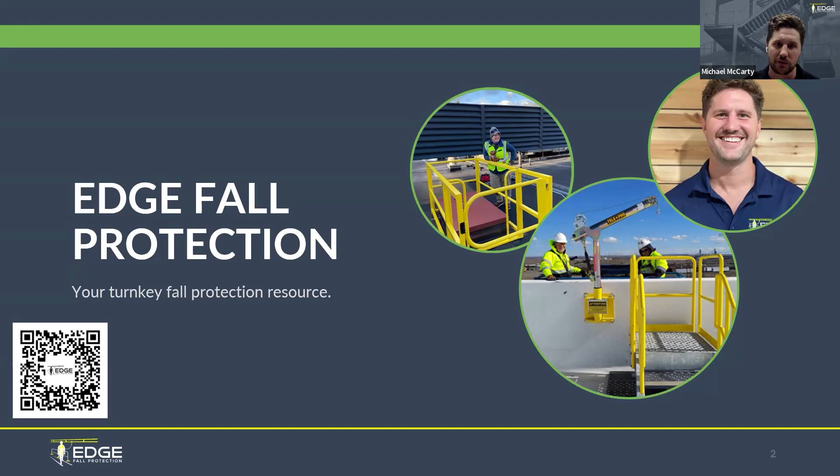Great. So what we're talking about today, we'll talk about the regulating agencies. Really briefly, we want to talk about the ladder code updates, some of the challenges that we're seeing, some of the solutions that we have, and then practical compliance options, followed by, as I mentioned before, that Q&A.

Great. So important safety codes to start off with. I think most of us are probably familiar with OSHA and ANSI. These are the two agencies who really impact the regulations we're talking about today. OSHA, run by the Department of Labor, governing body that enforces regulations to keep workers safe. ANSI, which is a nonprofit organization that coordinates the development of voluntary consensus standards.

So it's a lot of industry professionals in a group that get together and say, hey, here's the OSHA requirement, here's the OSHA standard. How do we take this, kind of make a gold standard, if you will, of how to come up with equipment, inspect equipment, and general guidance for safety.

The specific safety codes that apply to fall protection vary generally. OSHA 1910, we'll talk more in depth about subpart D, but OSHA 1910, it's the requirement that employers need to provide fall protection to all their employees exposed to fall hazards.

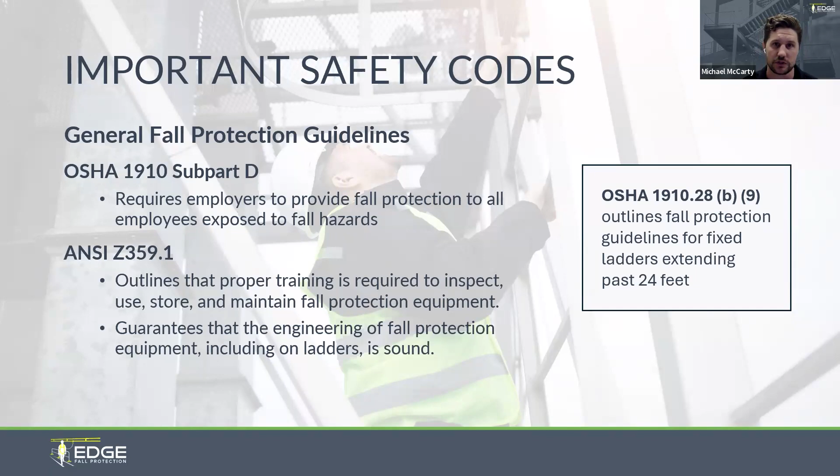Great. So ladder update codes. Would love to know, I think you'll get a Q&A question here. What type of fall protection do the fixed ladders at your work sites use? So I'll just give 30 seconds here for you guys to answer that one.

Awesome. Thanks for the input. So not a lot of personal fall arrest systems in the mix so far. Some no cages, and then no fall protection at all, and definitely some cages still in play there.

So the OSHA update, that 1910 update. So it was the subpart D that came out. The 1910 segment hadn't been updated in maybe 50 years. So what it said was, as of November 19th, 2018, so several years ago, cages are no longer considered an adequate form of fall protection.

So I imagine that there are people in attendance that have had a ladder put on their structure or building since 2018, and it may have had a cage on it. I was at a Master Specifiers retreat in Savannah, Georgia a few weeks ago.

I definitely spoke with some specifiers, some architects that were actively working on a ladder with a cage in it. A lot of people don't know that this is a requirement, but any ladder that was built and installed after 2018 should not have had a cage on it. Going forward, all fixed ladders extending over 24 feet must be equipped with a personal fall arrest system. So that is a little different from what it used to be.

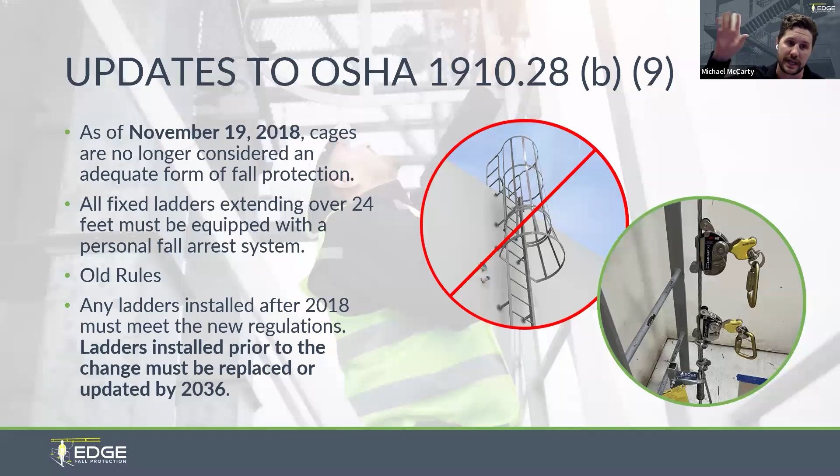And then finally, any ladders installed after 2018, as I mentioned before, must meet the new regulations. Ladders installed prior to the change must be replaced or updated by 2036. So if you had a ladder in 2017, that needs to be updated to the new standard by 2036.

Quick timeline for everyone. Pre-2017, as I mentioned before, cages are considered compliant. Cages really provide a false sense of security. They don't really effectively prevent falls. You slip on a ladder, you fall on a ladder, you're going down, and that cage, unless you're the perfect size for that cage, isn't necessarily preventing the fall. But it is maybe banging you on the way down, maybe limiting the speed at which you were falling. So some issues came out of that, which I'll talk about with the BLS statistics in a moment.

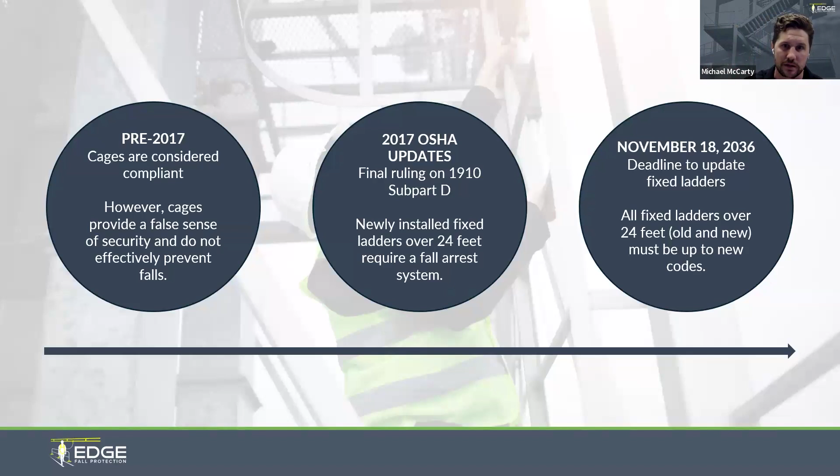In 2017, OSHA updates that final ruling on 1910 Subpart D. Again, newly installed fixed ladders over 24 feet require a fall arrest system. And November 18th, 2036, that's the deadline to update fixed ladders. So all fixed ladders over 24 feet, new and old, must be up to the new codes. So they give us a decent amount of time to say, hey, this ladder is out of compliance as the rule is written now. We have until 2036 to fix it. 2036 is going to come faster than we think if we don't plan ahead.

So ladder safety challenges, kind of why did OSHA update their regulations? Another quick question for everyone. Have you or someone you know experienced a ladder related injury? Okay, so 12% of the folks have had a ladder related injury. So quite a bit. And 35% know someone that has. So almost half of the polled group either has been directly impacted by an injury or knows someone that has. That is a very high statistic.

Some other statistics for you guys. This, again, is BLS, Bureau of Labor Statistics; the most recent data we have is from 2020. Ladders are always in the top 5 of the OSHA top safety violations. The last year, in 2024, they were 3, and in 2020, there were 22,000 non-fatal injuries from ladders, 610 fatalities, 130,000 emergency room visits, and $24 billion in expenses.

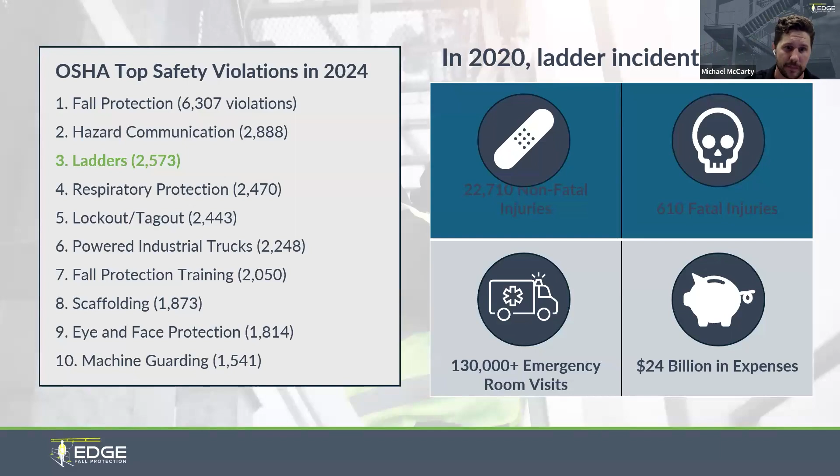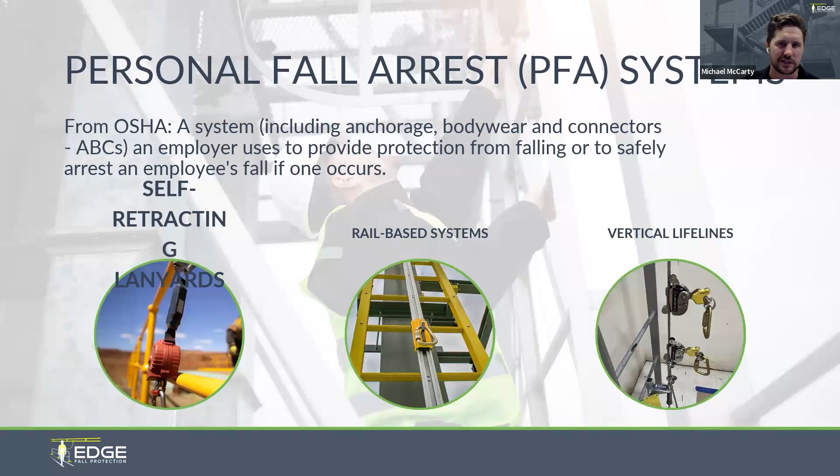Of the three of these systems, the price really varies depending on the application. Not one is better than the other. It just kind of depends on what you're going to use it for. But vertical lifelines are generally going to be the most cost effective for folks.

So some important considerations for this personal fall arrest system is we need an anchor point. So first off, we need a qualified person that must verify that the ladder is equipped to absorb the load of a fall. This is the thing that I'm not seeing in the industry generally. So someone goes out on Google and Googles a personal fall arrest system for a ladder. They buy something off the shelf. They have their maintenance team or a professional like us install it.

But what's out of scope is those loads in the event of a fall need to transfer to the ladder. And then those loads need to transfer from the ladder to the structure or whatever it's mounted to. So if this ladder is not mounted to something robust enough, I've seen screws into aluminum studs on ladders that barely hold the weight of the individual. Imagine the forces of a fall being exerted on that ladder as well. The ladder could come off the building, or you could have some issues with damage that the ladder does to the structure.

So it is, I think, very important for us to think about, yes, we buy a system, but how do we make sure that we integrate this system into the structure that we have to ensure that in the event of a fall, the system that we bought actually protects the people that we want to.

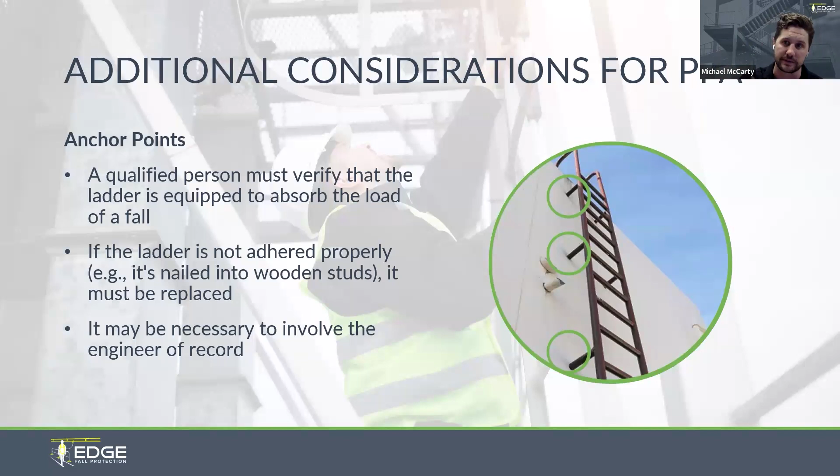So when we generally do these sorts of things, we can go out in the field, we can look at drawings, and we can do engineering analysis of what those loads do to the ladder and the structure. But generally, it's a little more cost effective for us to do the analysis on the ladder and then pass that work off to the engineer of record. So the engineer of record can review and say, hey, this is how this ladder is mounted. This will or will not be appropriate for our building.

Pros and cons of this. So there's multiple options. It can be added to pre-existing ladders, and it definitely provides mobility for workers. So cons, we're talking about putting on a harness and using fall protection every time we're climbing a ladder now. So it definitely requires additional training.

And it might require you guys or companies to swap out the harnesses that they have because you only have a harness with a dorsal D-ring. And that's okay if you're using that SRL with a tagline, but if we're using something like a vertical lifeline system towards the front or a cable system or a rail system on the front, we're definitely going to need that chest D-ring. So it requires additional inspection, application of safety gear, as I just mentioned, and the ladder might need to be replaced if it can't support the load of a fall.

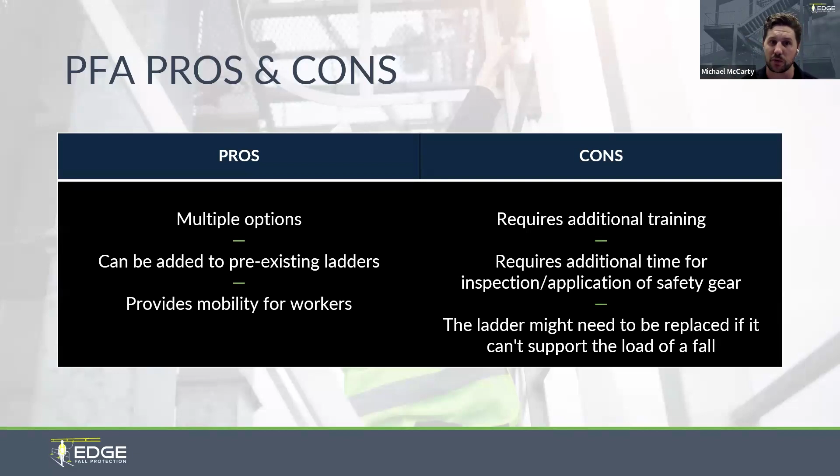One other thing that we're seeing a lot of is folks switching to stairs. So getting rid of ladders altogether and going to a stair access to the roof generally. What this is going to do, it's going to increase safety and stability, better load carrying capabilities, reduce worker fatigue, improve accessibility. And I think one of the biggest things that I've seen in site visits is that it's easy egress in emergency situations. So a lot of food and bev facilities or cold storage facilities, they have a ton of ammonia pipes on the rooftop.

If they have a leak and they need to get down, or if you're in any explosive environments and there's a fire and you need to get down from the roof quickly, if you need to descend a couple ladders, that can be time consuming. It can be time consuming to tie off correctly, use those vertical lifelines and the front ladder safety systems to get off that roof as quickly as possible.

The other thing about stairs is that they're really a passive fall protection solution. So we talk about the hierarchy of fall protection a lot in other webinars and at Edge generally. It goes from most effective to least effective. So most effective being that green eliminate, least effective being administrative towards the bottom. And arrest is second from the bottom, the second least effective method of fall protection. That's what these personal fall arrest systems are on ladders. If we switch to a stair, we're talking about a passive, so that's substantially safer, substantially more effective than just a personal fall arrest system.

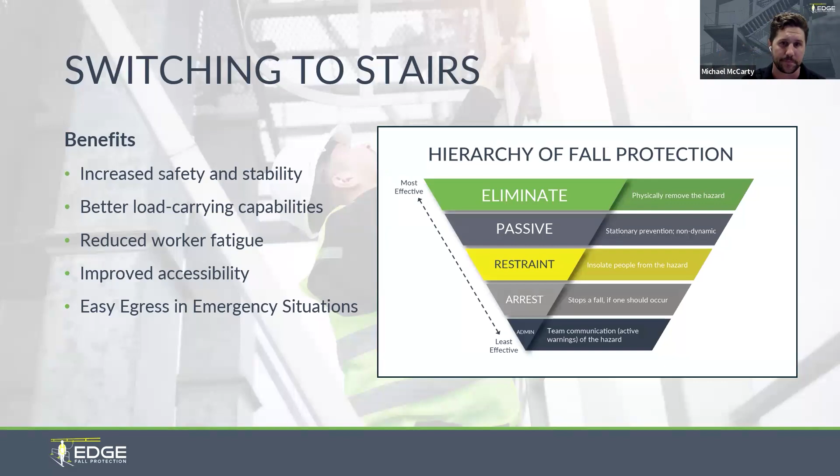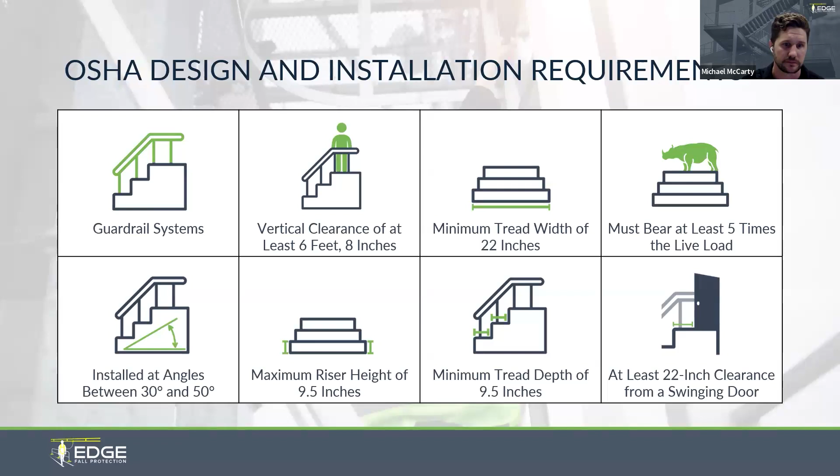Just some design installation requirements. If you work with us or if you work with someone else, just make sure that the stairwell is designed per OSHA requirements. Then pros and cons. So pros, it's easier to use, requires little to no training. I think we all know how to go up and down stairs. Long-term economic benefits, fewer OSHA violations cited, less risk of injury and settlement. And the cons, they definitely require more space than ladders. They aren't feasible in every situation, and there's a much greater initial investment than adding just a vertical lifeline or SRL to your existing ladders.

The price of putting a fall arrest system on a ladder is relatively insignificant for the off the shelf. But if you look at the engineering costs, if you have to replace the ladder, those costs can get substantially higher. Then it might make sense to investigate a stair, or if you just want to eliminate some of the training requirements and the concerns about people using or not using the personal fall arrest systems on a ladder. Stairs is a great option as well, but stairs are anywhere from 20 to 50 times more expensive than using a personal fall arrest system on your ladder.

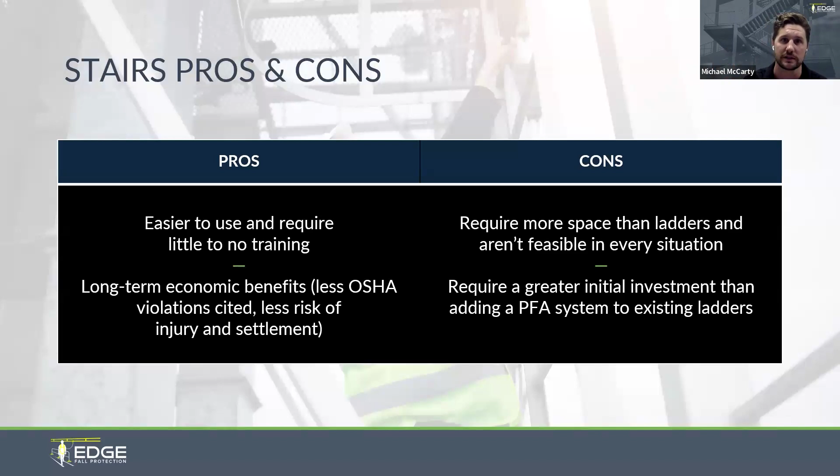For sure. So the first question we have here is, what is your favorite kind of ladder? Favorite kind of ladder. I guess when I don't have to go up, but stairs are easy, they're simple. Most ladders that we look at, they're going to be steel, aluminum, fiberglass. It all depends on your application.

Aluminum is going to be a little bit lighter, but as I mentioned before, those rungs are generally hollow. So if you're thinking about installing some sort of personal fall arrest system, again, that system is designed to self-destruct, and it can sometimes collapse the rungs that are on an aluminum ladder. So you would want to make sure that you reinforce those rungs; we usually use some sort of threaded rod in a couple different rungs to make sure that it just doesn't completely collapse those rungs. Steel is a great option. It's just going to be a little heavier, and maybe a little more robust on the installation side.

Awesome. And you mentioned it during your presentation, but maybe touch on it again. What does OSHA have against cages? Yeah, they did an analysis, and they looked at what are the benefits of having a cage, how much is it costing. We saw the Bureau of Labor Statistics numbers, so those numbers are large. Ladders are causing a lot of injuries. Ladders with cages are causing a lot of injuries. They're causing a lot of fatalities, and they're costing a lot of money.